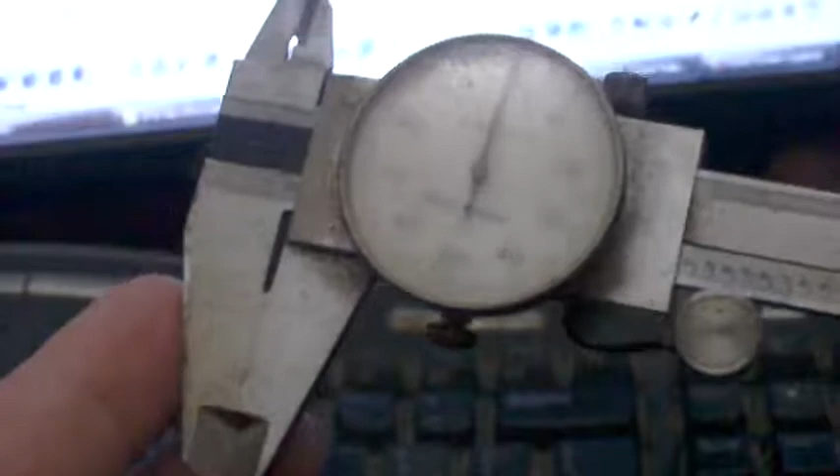Okay, before I get started on the actual CAD work, might I advise, if you're doing a lot of work like this, pick up yourself a pair of calipers, or a set of calipers. I picked these up for like 15 bucks or something at a wholesale tool company, but this was about 15 years ago.

The point is, you can find some pretty inexpensive calipers out there that are halfway decent quality. Because these are nice and solid, not flimsy or anything. But again, they were from 15 years ago, so who knows what the quality is these days for such inexpensive calipers. These aren't Starretts or several hundred dollar calipers, but it's certainly an essential tool to have.

I'm starting, let me show you this. That's our LED candle, and I'm going to use this as the starting point for my drawing because some of the components in there I'm going to actually reuse in this design. So I usually will start with a pre-existing drawing and just erase all the parts I don't need and keep the parts that I do need.

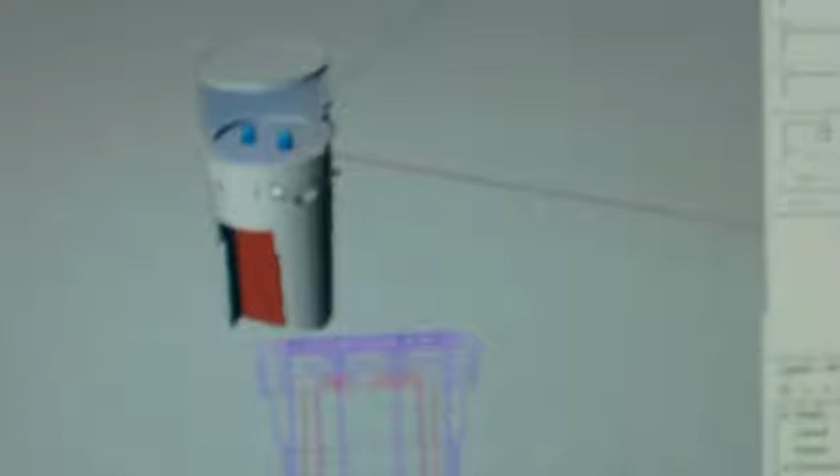So one of the first steps I always go through in a case like this, and you can see... let me get the camera adjusted here.

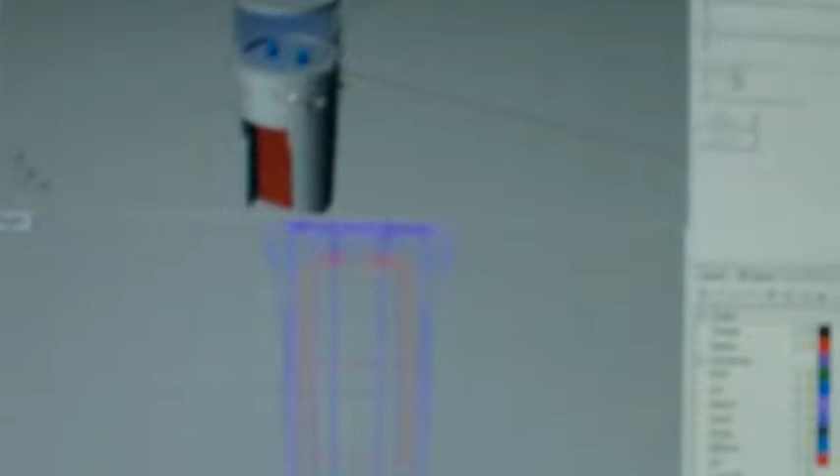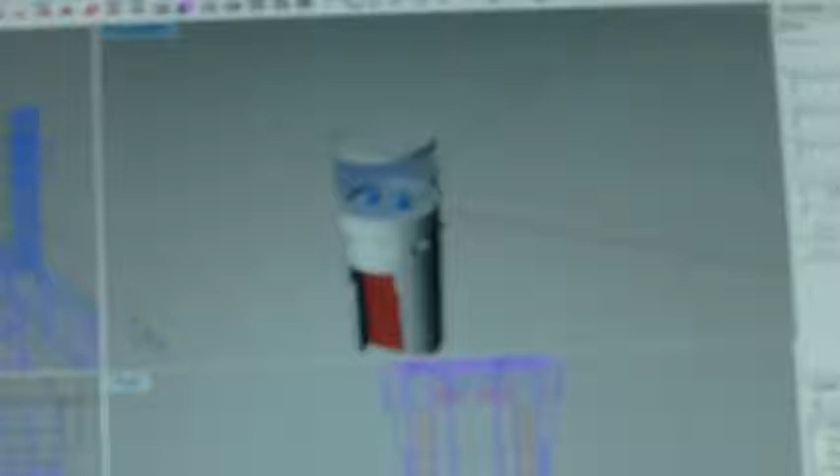You can see here that I'm in this project. I'm not going to need this, I'm not going to need the base and so forth. Let me go ahead and hide those layers. And the top, okay. And the bottom, and the stand.

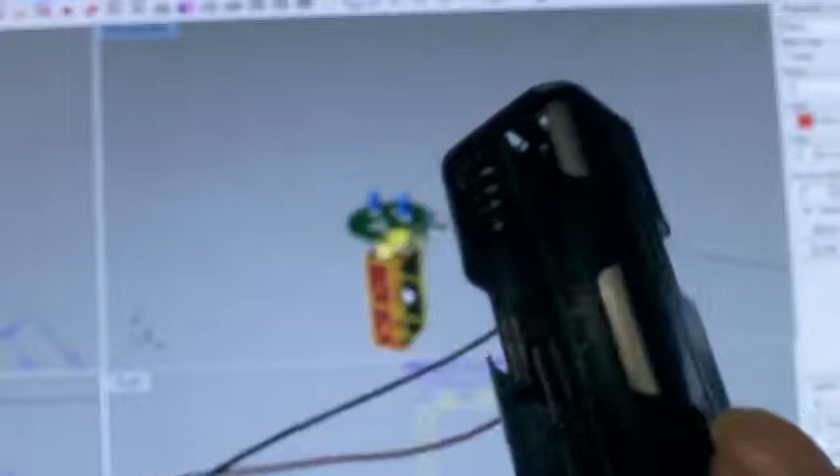Now I'm going to do a different battery because, again, this design is going to use this holder. So I'm going to have to dimension these parts and do a CAD mock-up of them. It doesn't have to be precise, but enough that, like on this battery holder, we want to know what the exact, very close to the exact, dimensions are on it, as much as possible.

It's like this 9-volt battery I've got shown here, it's just a crude approximation, and that's all you need. But I'm certainly going to reuse some of these LEDs, these resistors, and these switches in this design. Everything else is going to pretty much change.

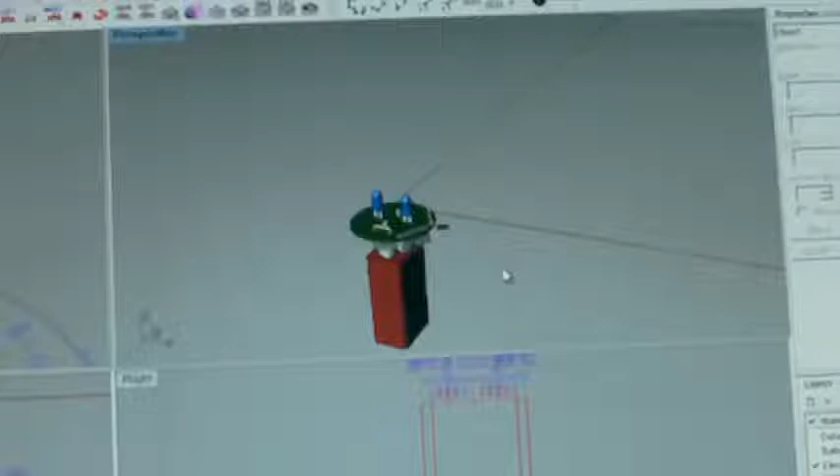So the first step to go through is taking your calipers and getting the dimensions. Now this happens to be approximately 1/8 of an inch. Which, if you've never used calipers before, here, let me put it on close-up mode.

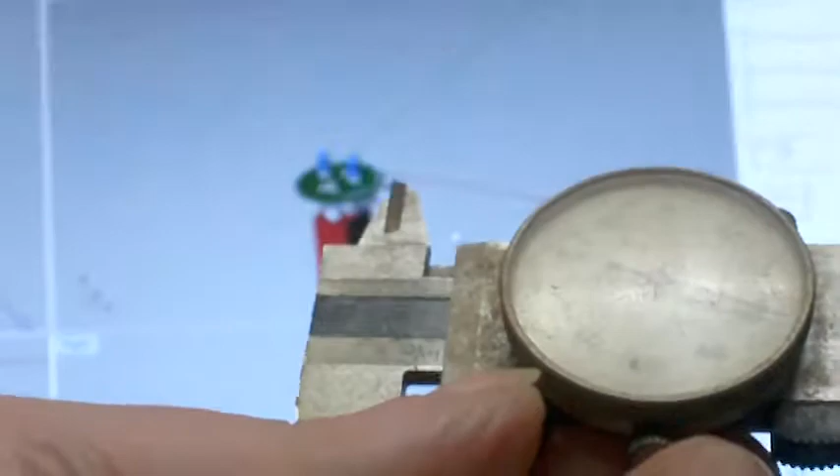If you've never used calipers before, this scale here reads out in 10ths of an inch. You've got basically 10 10ths of an inch as you read up along that scale, and you read it based upon wherever this is.

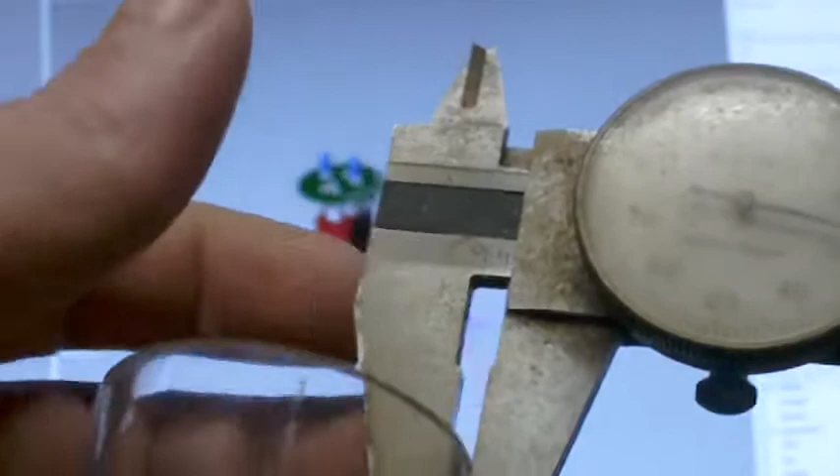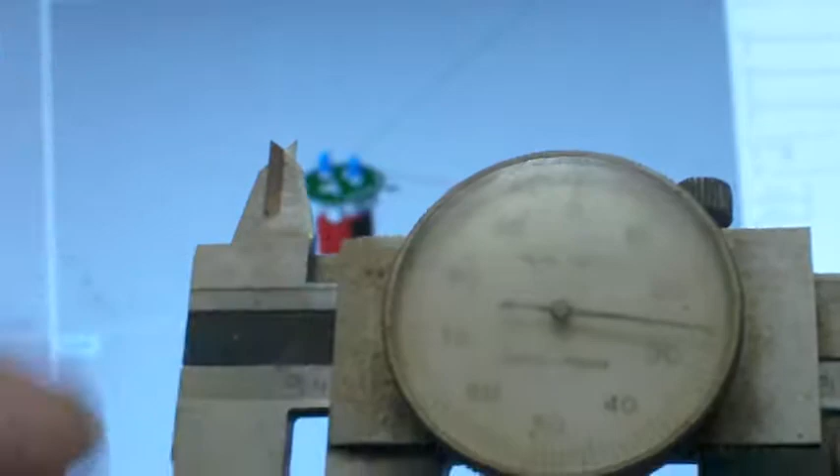So to measure this, like that - I don't know if you can see it or not, I usually have to use a magnifying glass - but that's got 1/10th of an inch exposed, and then it's a little over that, and you read the little over part on the dial here, starting from 0 going up to 30. 1/8 of an inch is 125 mil, so there's your 100, and here's your 25, and that's about 27 is what it's reading. Again, there's probably going to be some error in it. Actually, now that I put some pressure on it, it's only about 122 mil. But again, approximately 1/8 of an inch is good enough.

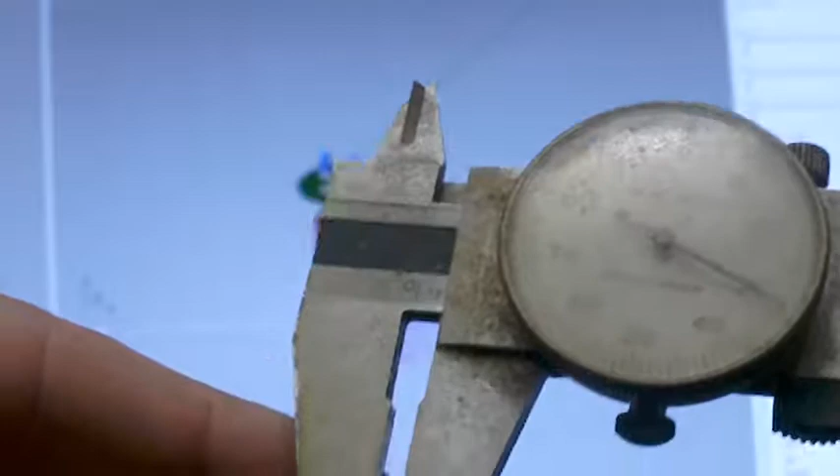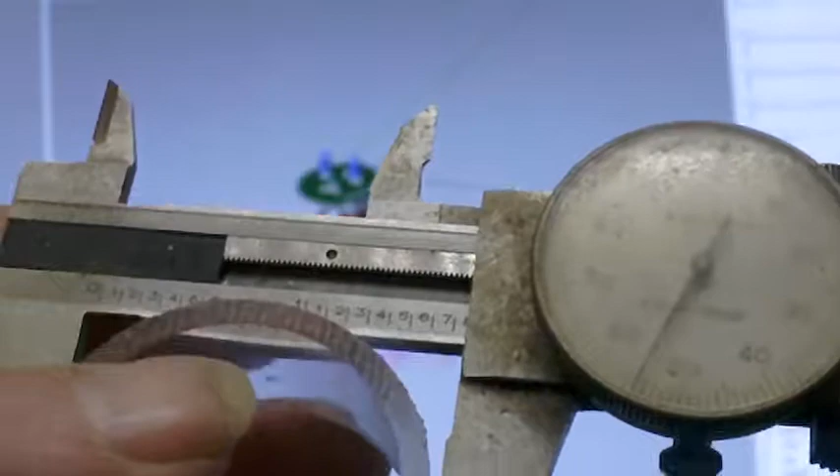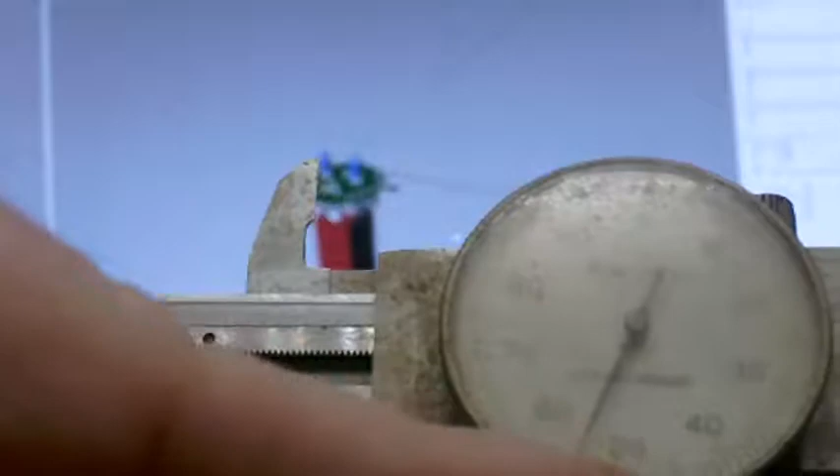Because this is an 1/8 inch wall tube, and I can measure the overall diameter of the tube at - you see 1 inch, so that's 1,000. There's a 7 there, but the 8 isn't quite showing on the scale, if you can see that. So that's 1700, and then you read this, and this says 55. So that's pretty much very close to 1 3/4 of an inch, 1.75 inch.

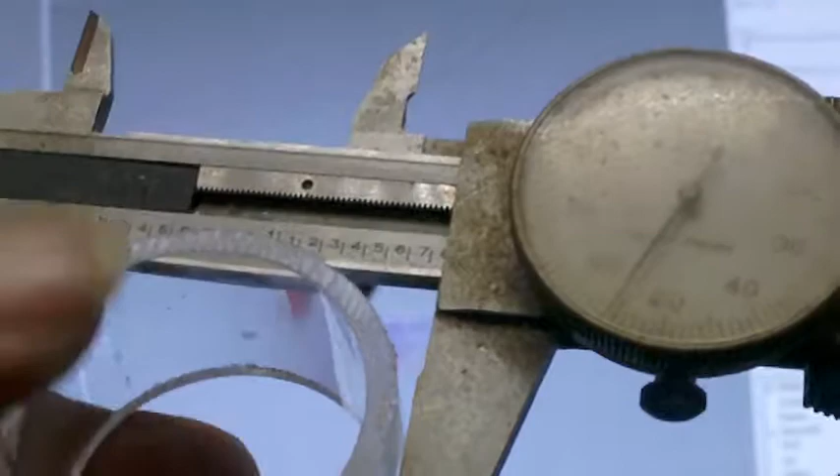Or 1755 mil is what it is. And it's good when you're doing this to actually use exact measurements, because you don't want to come out wrong on your part, since the 3D printing's not precise to begin with, and you've got to kind of plan around your tolerances. So that's why I do that. Well actually, this isn't the part I'm using, it just got in the way - it's a great example, but that's how to use calipers. This is the part we're going to actually use for this project.

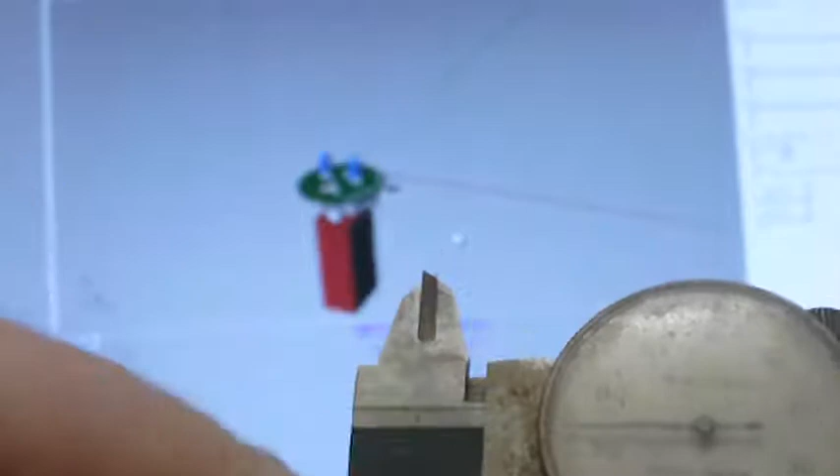This is actually less than 100 mil, if you see that. In fact, it's about 75 mil in diameter—a little over 1/16 of an inch, which is 63 mil. So that gives you that idea.

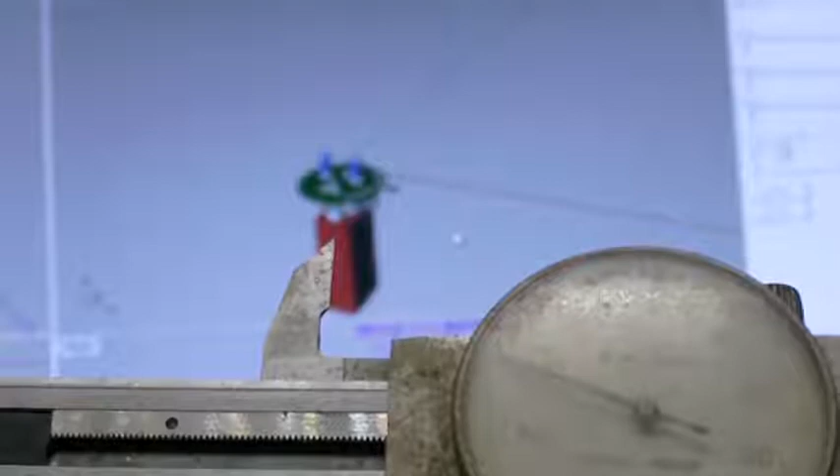This is pretty thin walled, about 75 mil, and this is PVC tube, by the way. That other piece I had is acrylic, but this happens to be big enough for what I need. I'd rather have it acrylic, but without ordering an expensive piece of tube, I just had this lying around—it's part of my vacuum system. I've got a shop-wide vacuum system with those clear tubes on it, the big long ones you stick together to hook to the central vacuum system. That's what this is.

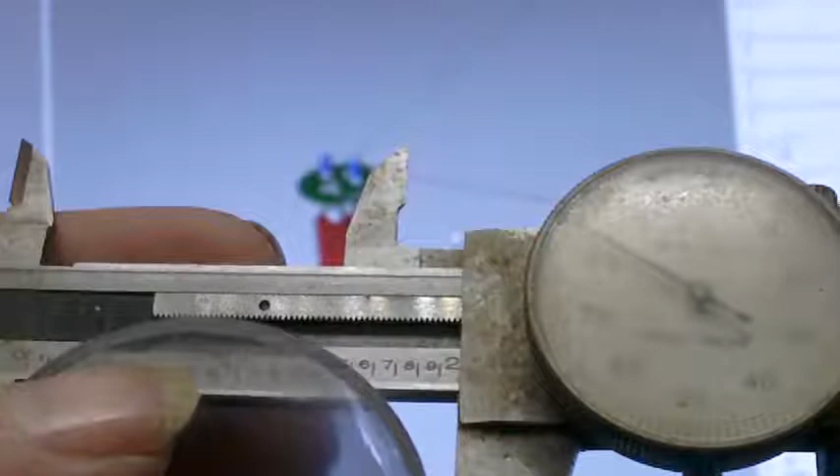Anyway, the diameter is just about 2 inches, a little under 2 inches—about 1,995 or 80 mil, 82 mil. So that's a pretty good size. As for the height, I'm not sure, because I'm probably going to cut this down, so I'm not going to worry about it right now—I can always stretch it out.

Let me go ahead and take care of that here. I'll put this into computer mode eventually, but right now, since I'm doing things with the calipers, it's easier for me than to switch to screen capture mode. So I'm going to start by drawing a circle here.

I'm going to position that at 0, 0, and we know we need 1.982—that's what it was, right? And for the inner wall, I'm going to grab this offset tool, and we want that to be 75 mil, 0.075 inch. So I'll put that in there, and that gives us that. At this point, I'll go ahead and do an extrusion on this, and I'll just make it, say, 2 inches arbitrarily. So you can see there's our tube.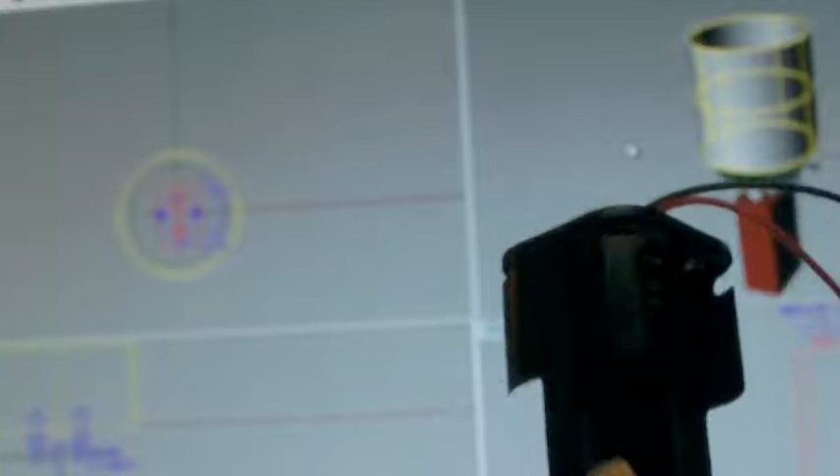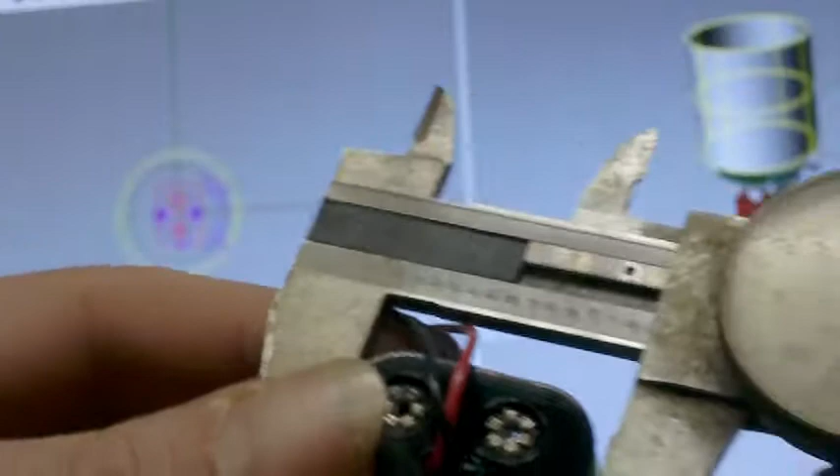Now the next piece I need to diagram is, of course, our battery holder. When this thing has batteries in it—it's always a good idea if you can, I don't know if I've got any spare batteries lying here next to me. I usually just build in a tolerance for error on things like this. It's always a good idea to actually have the real batteries in it, because it'll stick out just a little bit. But right here, we're talking about this thing being about almost exactly 1.25 inches.

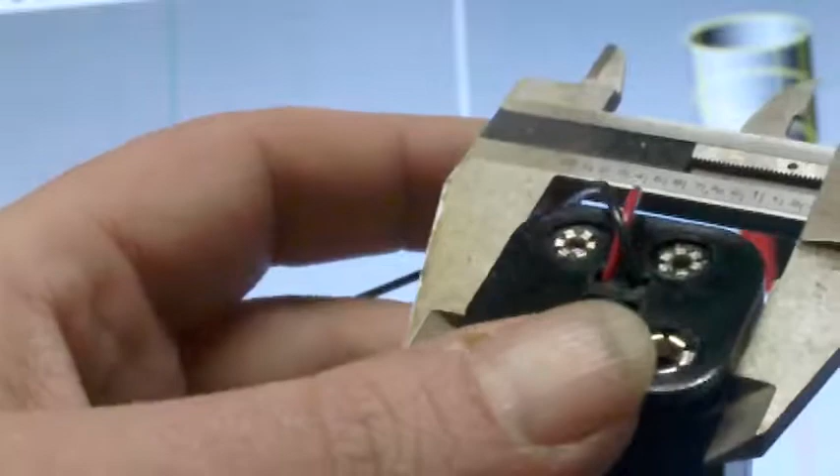Again, it's okay usually when I'm doing dimensions like this for it to be too big—it's okay if we round it up a little bit instead of rounding it down. But on that tube, we don't want to do that, because we want an exact measurement on that as much as possible. On this, we just care that whatever we design to hold this battery holder isn't too small to where, when you stick it in there, it won't fit. So it's good to leave a little tolerance to make it a little bigger, but it's at least 1.25 inches.

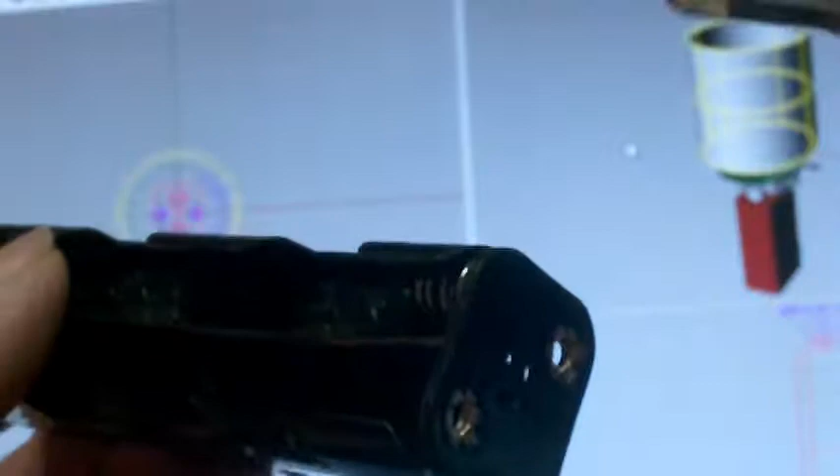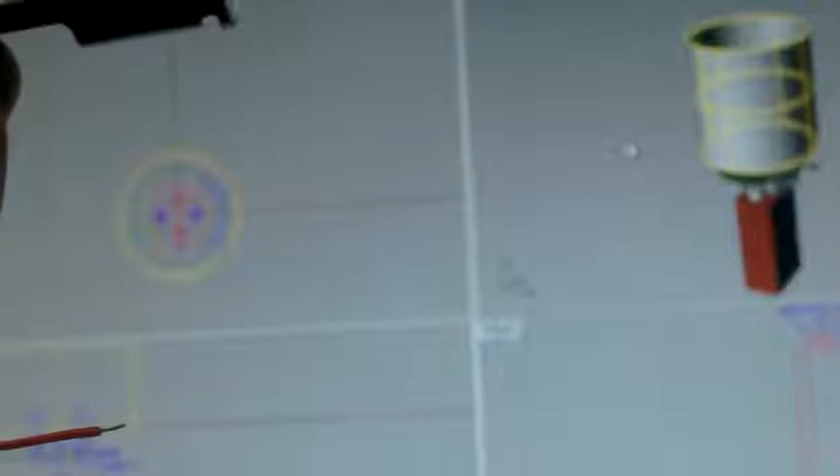So we're going to want to keep it to at least 1.25 inches, but I'd probably make it about 1.3 inches, to give it just that extra little tolerance—not a bad idea. That's there because this 3D printer, since I don't have it dialed in, will actually print things a little bit fat, for lack of a better word. In other words, if you think something's going to be that wide, it's actually going to be wider. So you've got to take that into account. You can tweak the thing and get it to be more precise than that, but you're also likely to have more issues with your layers not building up thick enough and things like that. That's one of the reasons I haven't tweaked my printer yet—I know that could be kind of a headache trying to get all those parameters dialed in properly.

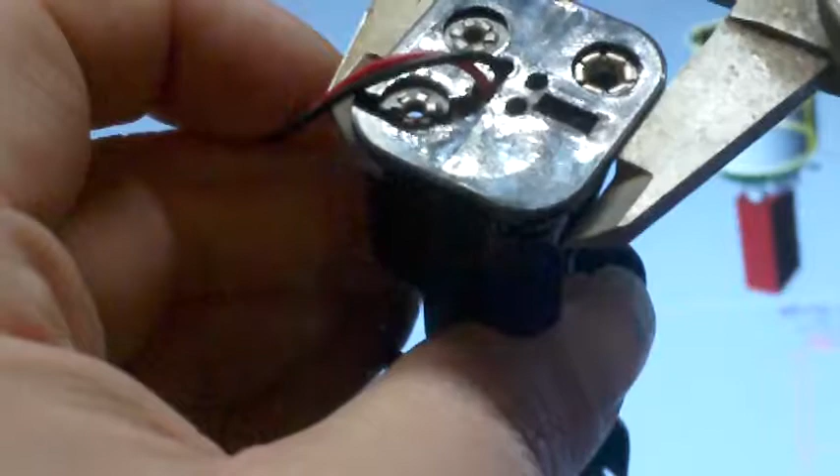I'll see if I can get some batteries here to test this out with. I thought I had some old ones lying around. I know I do, I just don't know what I did with them. I got some bad old batteries lying around here somewhere, I just can't seem to find them.

Now I'm going to go ahead and put some of these dead old batteries in here just so we can get a better measurement. It's a good idea to be safer than sorry, especially if you're using a program like Rhino, because it's a real pain in the behind to go change things.

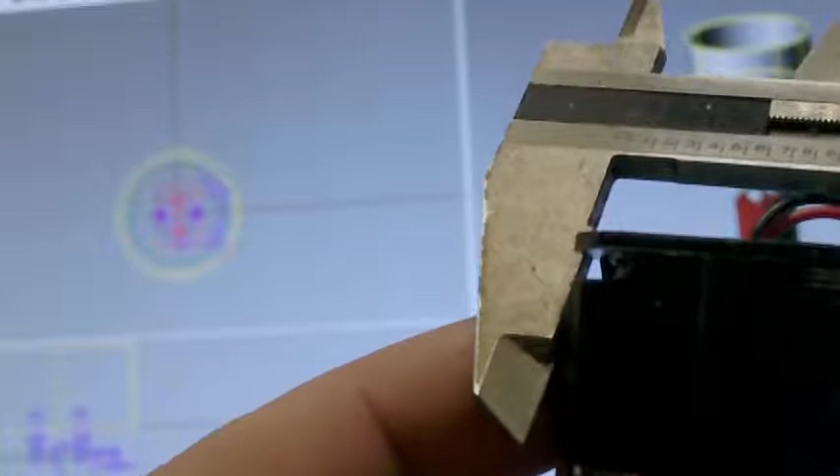If you made a mistake, and you'll probably see that, you have to go back and undo things. It's better to use a parametric CAD system, like SolidWorks or something, if you've got 5 or 10 grand lying around to invest in it.

But I do actually have an old version of Solid Edge I could use, but it's so old. I'm more accustomed to Rhino.

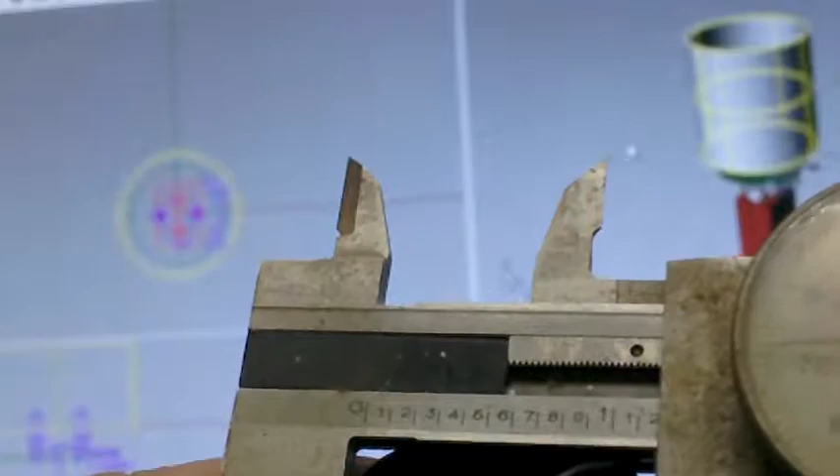But yeah, with the batteries in it, 1.3 inches would be safe, even with the batteries in it, because it doesn't make that big of a difference. But it's just good practice to look into it, because you don't want to find out later you're wrong.

So about 1.3 by 1.3 inch, and then my caliper is out into long mode here, which I usually use my wooden ruler for this. Let me get my magnifying glass here so I can read the thing.

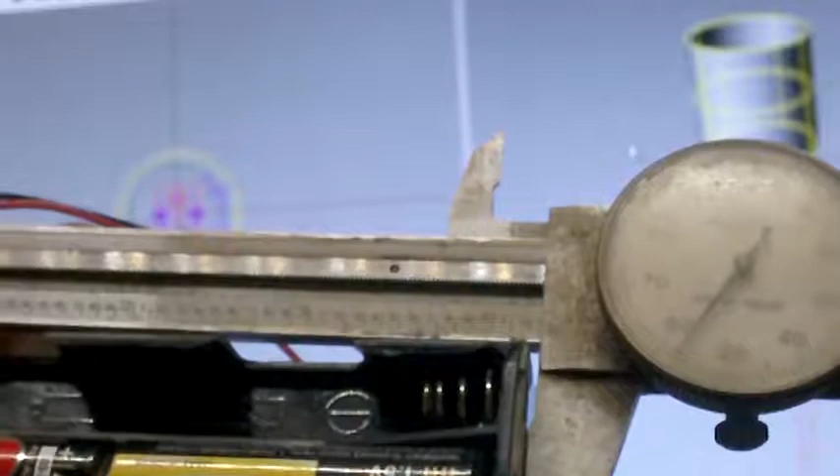It's pretty much 4.3 inch is enough, just slightly under 4.3 inch. So that's a good enough measurement. So 1.3 by 1.3 by 4.3 would be adequate for this as a representation.

Now, I'll just kind of draw this off to the side. Up here, 1.3, 1.3, 1.3 - enter C for close. It's one of the things I love about this program, being able to enter my measurements and then place my line. It's kind of cool.

Anyway, so that's our base for a square, and we don't have to worry about anything, but let's extrude it to 4.3 inch. Okay, so now we've got our new battery holder, which I'm going to go ahead and make that red. And I'll put it on the battery layer here. Okay, so that's our tube, and I'm going to go ahead and assign that a color. I'll make it blue and add a little bit of transparency and gloss to it.

Actually, I want to add a lot of transparency to it. Okay, alright, so that's got our battery.

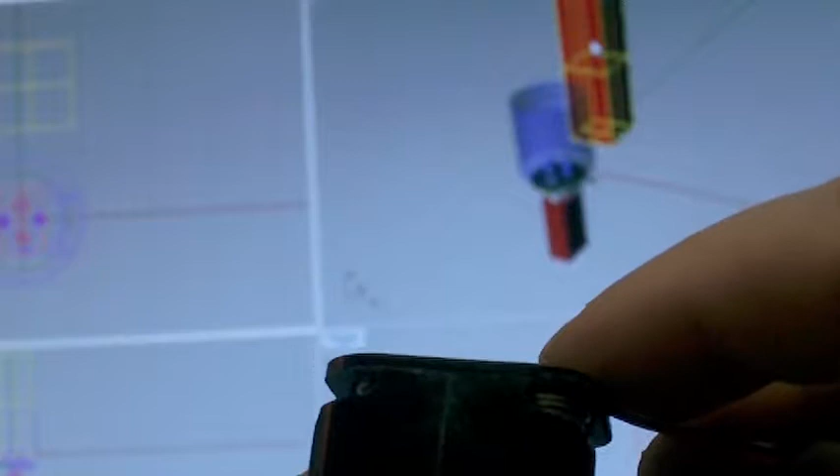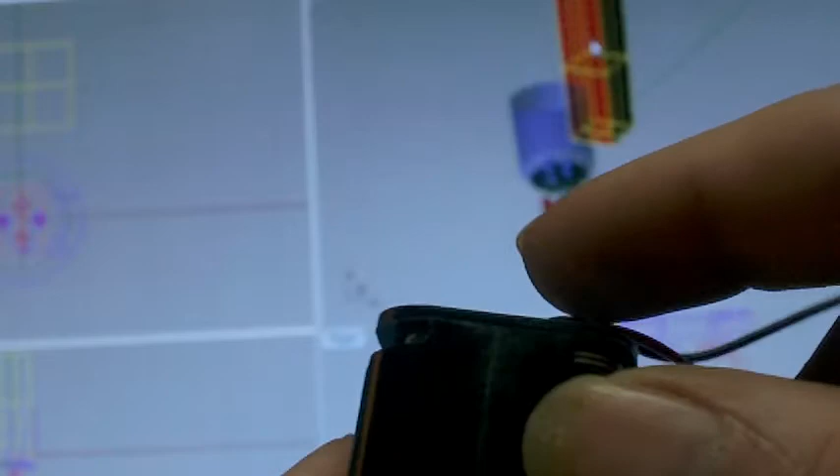Now, when we're working with this battery, we got to remember there are wires sticking out of it. And when we get to that point, that's a pretty good distance too. We want to make sure we got clearance in whatever housing we design for those wires to snug in there. Probably about a quarter to half an inch clearance, because these wires are going to kind of coil up in it whatever we do. So we got to have a length for the holder to come out, so we'll probably have to have maybe even a half an inch ceiling on this thing so that it fits in there.

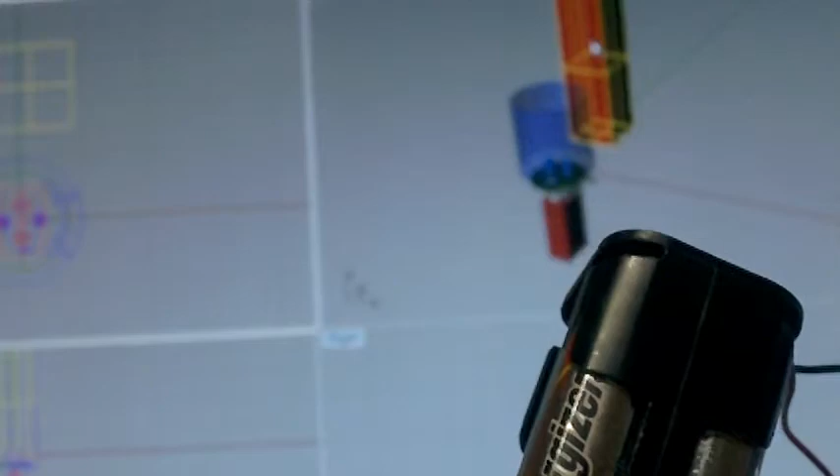I do know that on this project one of the things I'm probably going to do is on the base of this candle, I'm probably going to have a cup that goes in there, and then something that goes on top and screws in. So anyway, thought I'd get you started. Next we'll go into the CAD work itself.